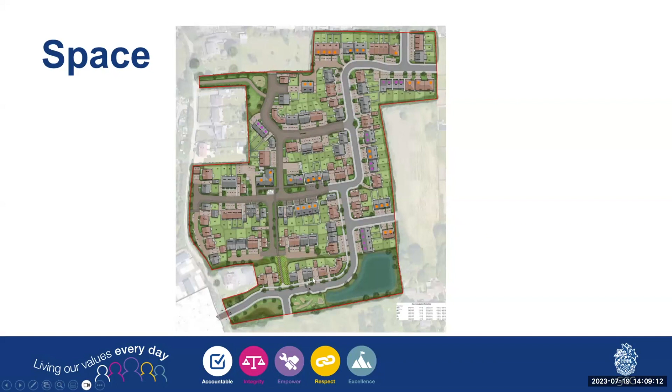And you'll see that what we're being offered is a tree, a generic green blob, into a verge between an adopted highway footway and an adopted highway carriageway.

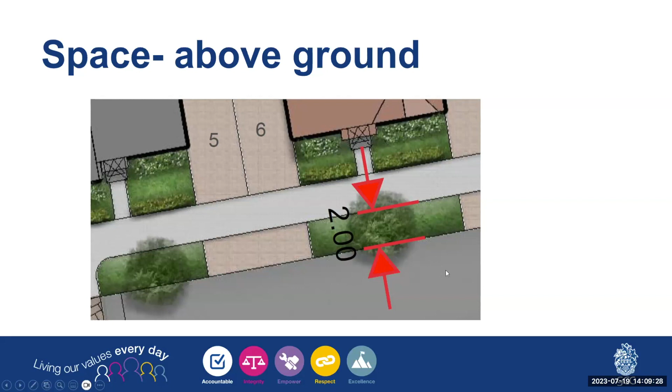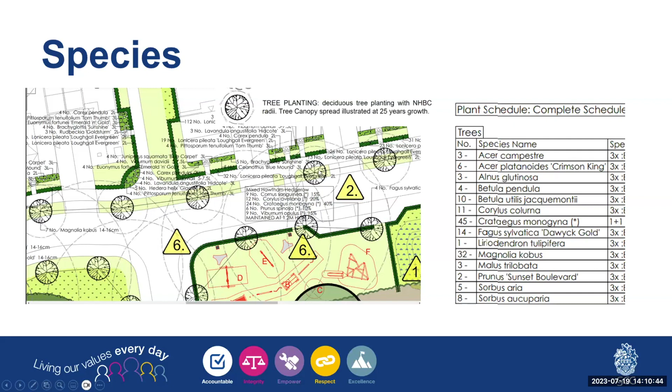No, I'm not an arboriculturalist - a lot of highway engineers, maybe I don't even like gardening very much, we don't have the expertise to know what that is. So I Google it, the RHS guide is generally my go-to. From that I can see that this tree, if it thrives to maturity, which is what we want, will have an 8 to 12 metre height with a 4 to 8 metre spread.

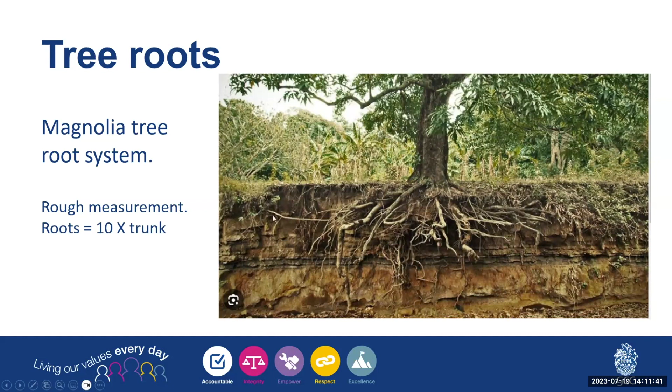I'll leave you to think about that. This is just something I found on a quick Google which I thought was quite illustrative - it's a magnolia root system, different variety of magnolia I suspect. But a very quick measure gives you roots spanning about 10 times the trunk diameter. So if we assume this trunk to have a diameter of about a foot, 300 mil, probably bigger than that but keeping the math simple, you're looking at 3 meters for the roots to spread.

Now let me just remind you of what space we're actually working with there.

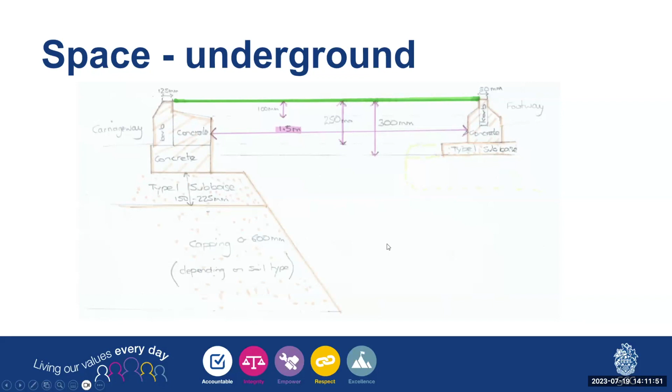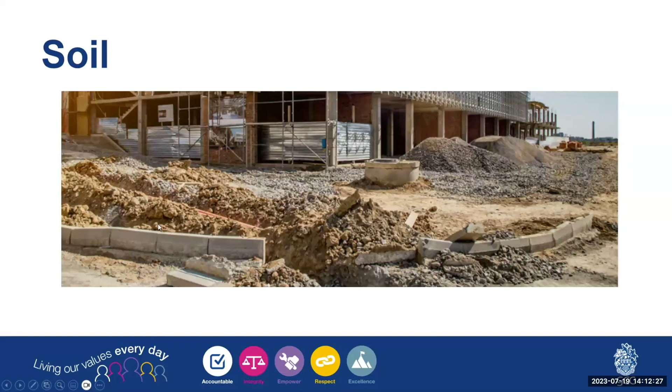Do you think it's appropriate?

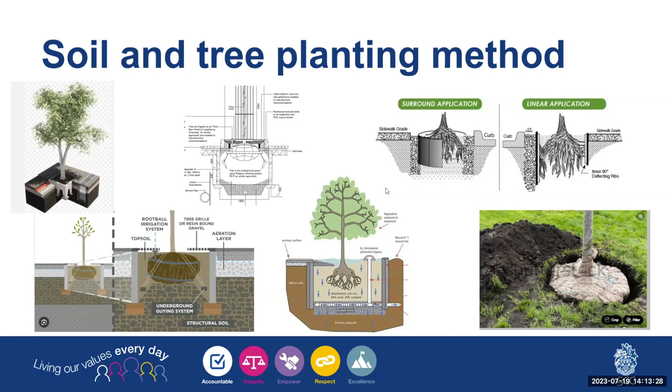So moving on to my last S, I told you this is going to be quick. Support. So I encompass that, it's just the initial support. You've got the stakes, ground anchors, drills, watering or not watering.

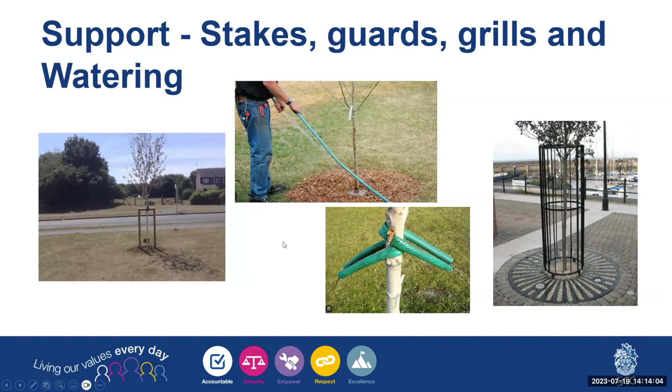So we need to understand what that species needs. That will depend on the weather, it will depend on the location, if it's windy, it will depend on the age of the tree. And also, if by some miracle we manage to get the space right, the species right, the soil right, and the initial support right, and that tree does thrive and grow to maturity, we've then also got to consider the ongoing long-term maintenance support of the tree.

Now, this is probably the hidden part of it. The first three parts that I spoke about, you're all probably very aware of - yes, get the planting right, get it started, get it watered properly. But this is what we as a highways authority, this is our legacy, this is what we're left with for 20, 30, 40 or more years. And it comes at a cost - it comes at a massive cost.

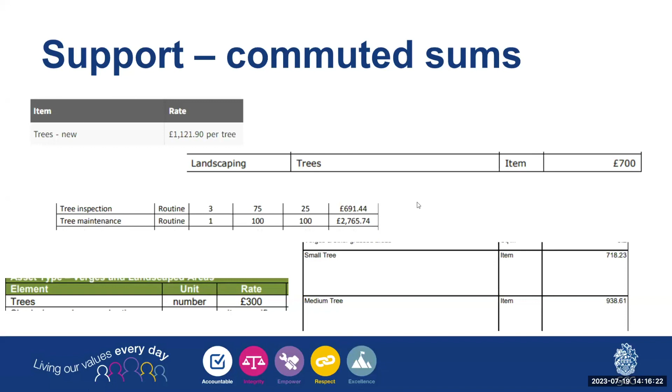So that is me done, I did say it would be quick. So these are the things that we need to understand as highway engineers: is there enough space? The space we start with, that's not changeable.

Species, is the species right for the space? Soil, is it the right tree planting method? And support, what support does it need long and short term?

So thank you very much for listening. Well, thank you very much, and that was brilliant. And I must say, I can't remember the last time I saw a magnolia as a street tree, so I'm with you on that one.

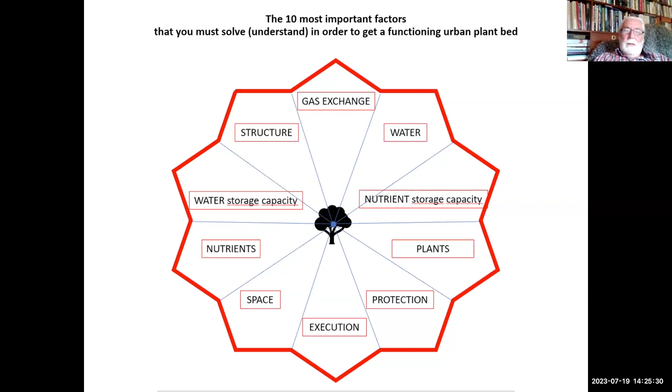And as I was fortunate to visit the University of Hannover, where they found out that the best material you could use in an urban environment to get a good plant bed, and to get the root system to grow the best and expand in the best way, is a stone material, sorted stone material in uniform sizes, almost the same size. Then you get the most voids between the stones, so you get extremely good porosity if you use this.

And we call it macadam in Sweden. I don't know what you call it, but it's crushed stone and it's sifted. And you can get up to 40% porosity in this stone material. And the biggest size stones we use below the streets and sidewalks, and the smallest we use in open plantation for shrubs, perennials, and trees.

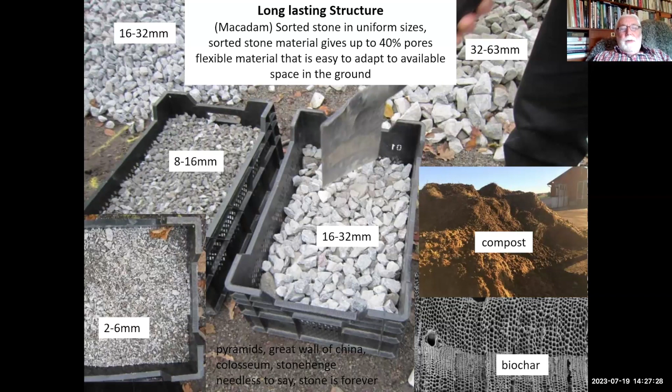So for example, the 2 to 6 millimeter size is what we plant all our perennials, shrubs and trees in, in open areas. And then we mix it with some sort of compost - you can use different kinds - and we also use biochar. Mostly we use the same amount of compost as biochar in the mixture. If it's below ground, below a hard surface, it's 15% compost and biochar. And if it's open space, open ground, it's 25% compost and biochar.

So this is how it looks on the drawing, a popular drawing from the handbook of Stockholm, where we show how we are building our plant beds in Stockholm. There's a very big stone material in the bottom, which is put down and then compacted, then flushed down with this combination of biochar and compost between the stones, so you don't get any compaction of this material that you flush down. Then you do it in different layers of 30 centimeters - compact the stone and flush down, compact the stone and flush down.

And then we have an aeration layer, an infiltration layer on top of that, so the plant bed can breathe and get enough oxygen, and you can also infiltrate the rainwater from the hard surfaces.

So this was the first method we used, and it was accepted because it was what we call macadam at the bottom, known as a road building material. Everyone building roads was familiar with this kind of material and how it worked. That's why we got approval for this the first time, because they could understand the material. But still we couldn't change the surface.

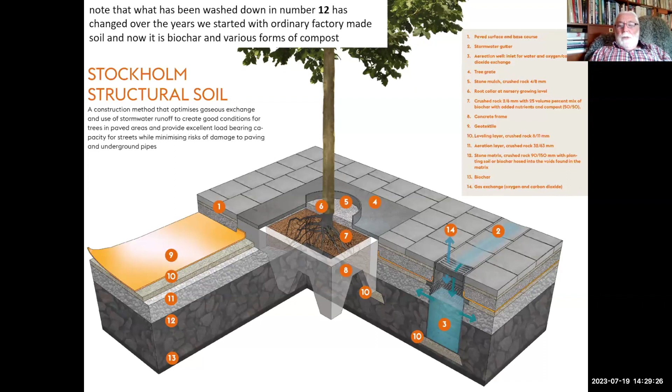Then we came up with the idea to make a simpler and faster construction, so we started to use a smaller size of stone. In this case, 32 to 63 millimeter stones, pre-mixed with 15% biochar and compost. It's easy to understand this is going to work so much faster in the construction period. Otherwise it's the same thinking - you use the well to infiltrate water and get the gas exchange to work.

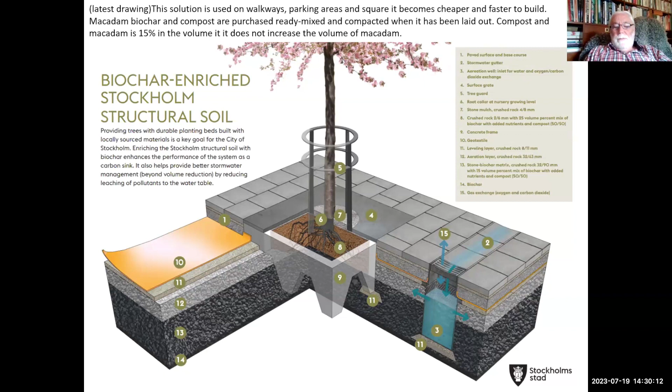Gas exchange, I always say, is the first thing you have to have the solution for, because if you don't have a working gas exchange, you won't get anything to work. You can go back to this and read it afterwards, because there's no time for me to explain everything about why gas exchange is important.

But you have to have oxygen in the ground. It's important for all the living organisms in the ground. If you want a healthy plant bed, you must have a good working gas exchange. And we make it with our wells or open surfaces.

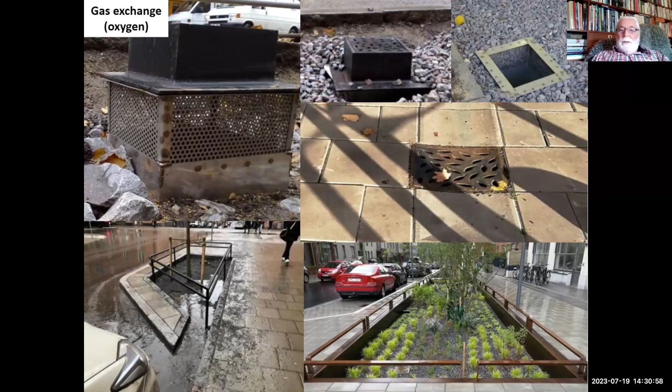So water - it's hard to say which is most important, but if you don't have oxygen, you can't breathe, so that's why I put it first. But of course, water is the second most important thing.

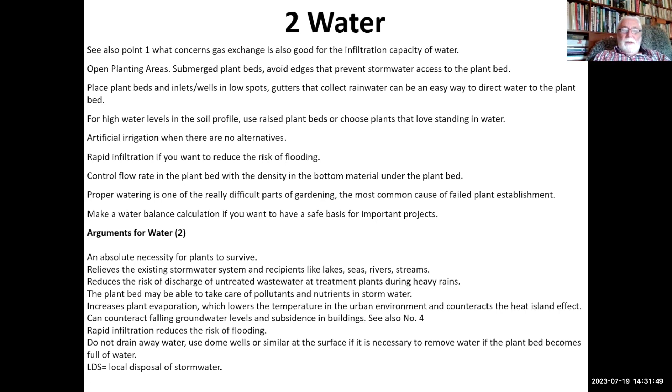And you have to know where you get the water, how you can infiltrate it, and how much water you can get. And of course it's fantastic for a city if you have problems with an under-dimensioned sewage system - you can take away a lot of water from the city this way. And of course, you should use it as close as possible to where you get the water from, so use the water locally.

And the same thing - we use the same wells to collect water in different ways as we use for the gas exchange. So they have the same function, or the same solution, to get water as to get the gas exchange to work.

Structure - of course you must have some structure. I mean, we plant Tilia, we plant Quercus, and we plant a lot of trees that are going to be several hundred years old. And of course you want to have a structure that will stay for hundreds of years if you plant trees. You can't depend on something that won't hold for less than 100 years.

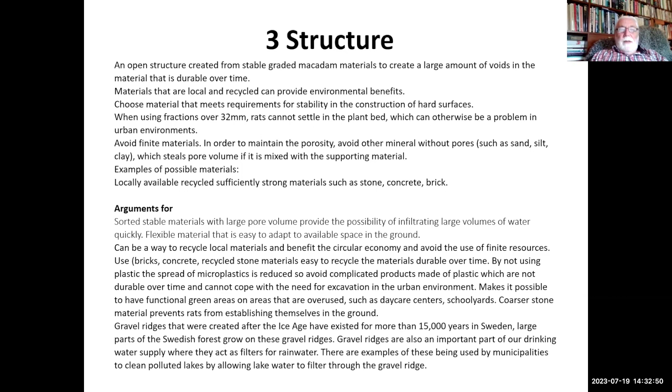So find your way of building a structure. In Stockholm, we use stone in the same way it looks in the forest around Stockholm - the old gravel ridges, eskers, I think you call them in England, from the Ice Age. They've been staying there for at least 12 to 15,000 years, and the trees are happily growing in these gravel ridges all around Sweden, and there's a lot of them.

And it's the same in mountain areas - you have crushed stones where trees are happily growing, and this supports the trees extremely well. It's good for gas exchange, and it's easy for the root system to penetrate this kind of stone material.

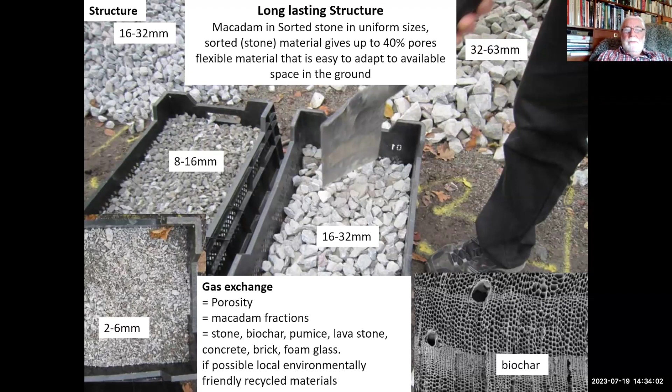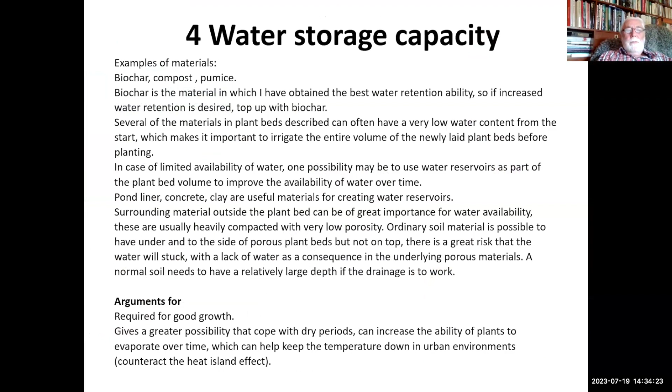Water storage capacity - we use compost and we use biochar. Biochar is fantastic if you want to have a good water storage capacity, and if you want to increase it, you use more biochar or compost. But biochar is the one that gives the best water storage capacity. Biochar, I don't know if you know about it - it's organic carbon, and it has extremely good qualities in different ways.

That's a whole long story that I could talk for an hour about biochar, but you can read more about it yourself. The compost could be it's so varied - you can add really decomposed compost, or you can have fresh organic material.

We have tried a lot of them. We haven't seen so much difference between the compost that we have been using. Of course, if it's a lot of easy to get nutrients, you can get much faster establishment and so on. And that's basic knowledge about how plants react to different kinds of nutrients.

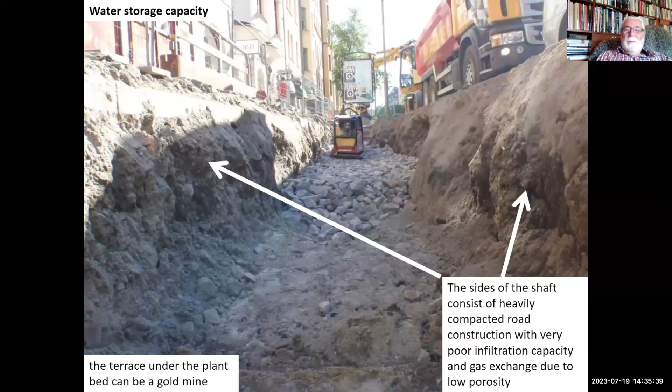Of course, the situation in the city is also important, what you have in the ground. It can be concrete, or it can be soil in some compacted way or something. Same with the nutrient storage capacity.

How we have solved that is using biochar. And it is amazing to see how much nutrients biochar can hold and share with the plants if they want it. And the same, the compost is also a source that can hold a lot of nutrients, of course.

What's happening in the ground when you use this mixture of stone and compost and biochar, you support all life in the ground, and you get the circulation and the increase of organic material, because the life is so happy in the ground. So it is reborn and dies and reborn, and the trees or the plants are putting down solar energy in the ground. So it will increase all the time if you have this open material that all the organisms are happy to survive in.

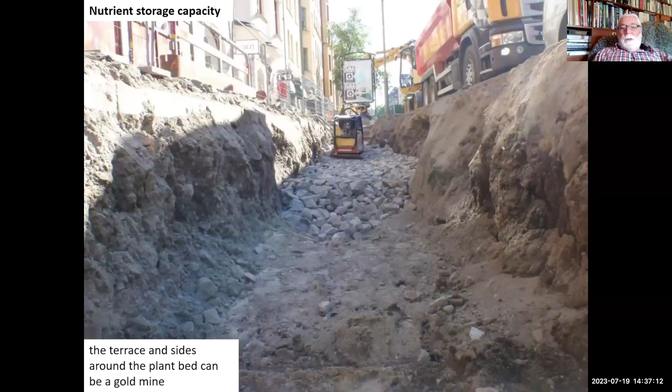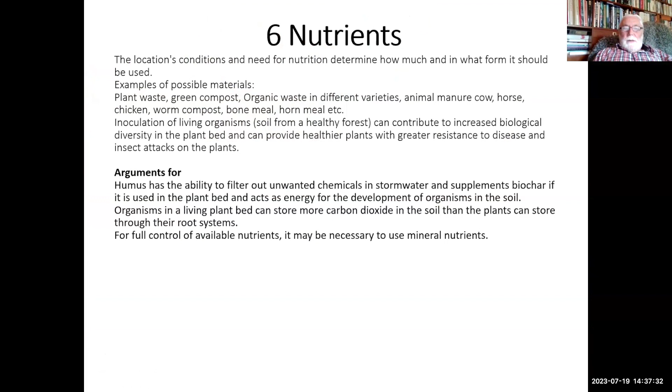And the same with nutrients - it can be nutrients in the surrounding material, of course, so it depends on what's around your plant bed that you're building. If you can get something for free from the ground below or on the sides of your plant bed. And as I've talked about before, nutrients depend on how much nutrients you want. If you're building your plant bed in a sensitive area with protected watersheds or something like that, you have to have less nutrients, of course.

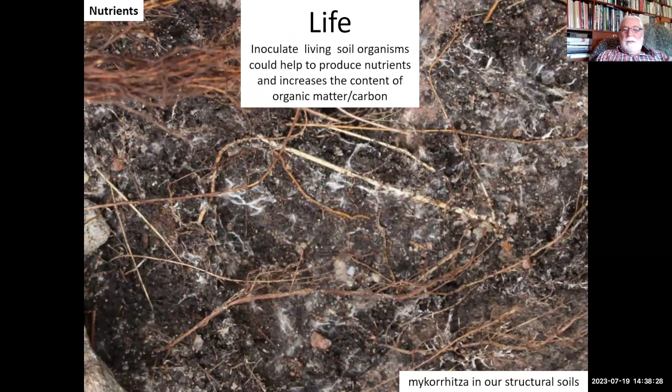But if you're in a king's garden in the middle of a city, you want to have annual plants with a lot of fertilizer that will give fast growth and healthy plants, then you have to put more nutrients in it. But we use different kinds of compost to get hold of nutrients. And of course, if you have this good environment in the ground, you especially need oxygen for the mycorrhizae to survive and support the plants too.

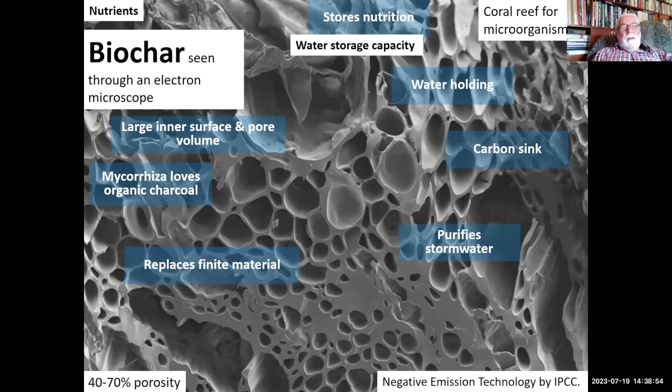And of course, the biochar is one of the solutions for us when we're using so much stones. We can have the biochar instead of sand and clay and everything, and they will hold the nutrients, and they will release it to the plants and to the mycorrhiza when there is need for it.

And plants, of course, you have to choose the plants for the place where the plant bed is, and how the situation is below ground and above ground. If you have space up, and if you have space in the ground, you can choose bigger trees, and depending on how much water you get hold of, you can choose different trees. If you have waterlogged conditions, a lot of water, high water levels in the ground, choose trees that love that kind of situation. And the opposite, if you have a dry situation, choose trees that can take that.

And space, of course, is important above ground and below ground, because if it's limited space, even if you get enough water and nutrients and everything, the plants can't produce a bigger root system - they can't grow as they could if the space is limited. So it's better to connect as many plant beds as possible. Then you will get better results for your plants.

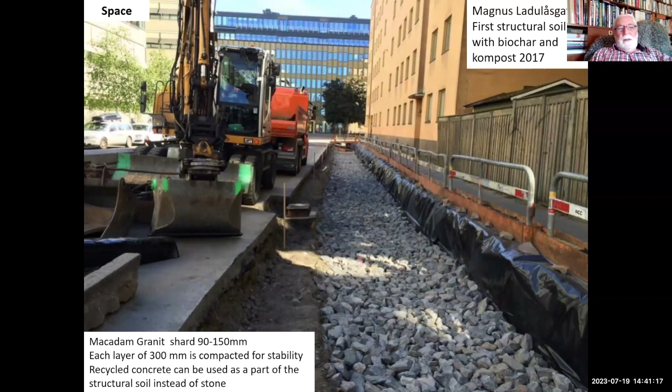But normally, if everything is right, the trees look exactly the same along the streets, and that's fantastic to see. Protection, of course - you have to protect your trees in some ways, and you have to think about how you do that.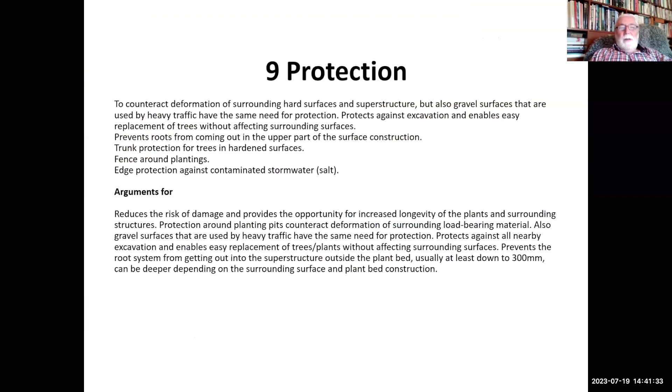It can be above ground and it can be below ground also. And this is how we plant. We use these kind of concrete boxes in Stockholm to plant trees inside that, but they're open so that the root system can develop out in the stone material. And it is easy to replant a tree if it's hit by a car or something and broken in some way. You just lift it up and put it down in a new one, and you don't destroy the surrounding surface material.

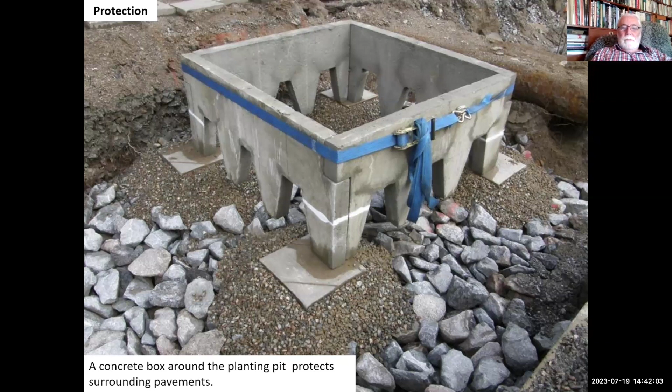But one of the most important things is how do you have control that the entrepreneurs that are building your plant beds are doing the right thing. You have to know what they're doing, and you have to control it in some way. You can't just trust an entrepreneur to do it right. You have to have control in some way. Otherwise, it can be a total waste of money when you make plant beds.

And we have had extremely hard control in Stockholm, where I have worked, and it has worked extremely well, both where we build these plant beds and afterwards for the maintenance. We follow the contractors all the time. We have a consultant out in the streets for the first 3 years, so we see that they water as they should and do everything that's in the contract.

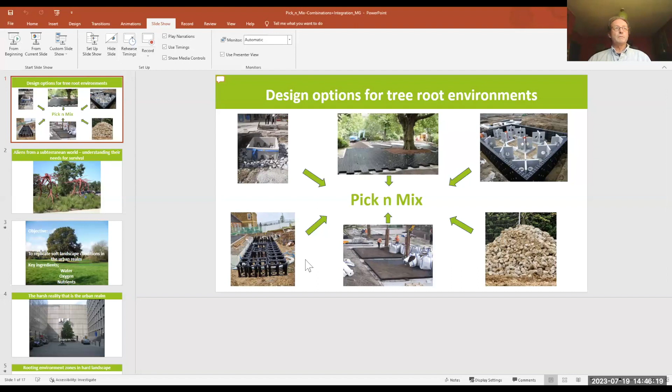I'm an arboricultural consultant and director of Consulting with Trees Limited. My background is in forestry, landscape design and construction, and primarily in arboriculture. And Consulting with Trees offers a broad range of arboricultural services and specializes in providing compatible growing systems within the urban realm for trees in all sorts of scenarios, but basically in hard surface situations.

And what we're going to do today is look at a few of the options that are open to you. You've heard about some of them already, and I'm hopefully going to run through why we need these different systems and how they might be most applicable. And primarily the fact that we've got a palette of options that we can use, and why use one if two is more appropriate. So just going to flick through the options that are available to you.

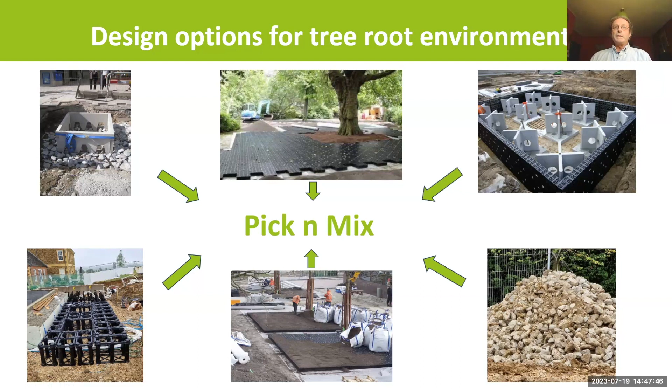But initially I thought we ought to start with why we need to consider these options in the first place. And I thought this, well, apart from the fact that I really like this sculpture, I thought it summarizes or brings home the fact that we really need to understand the below ground environment and what tree roots need, how they function, and what they need to survive and succeed in the built environment, as they would if they were in the soft landscape natural environment.

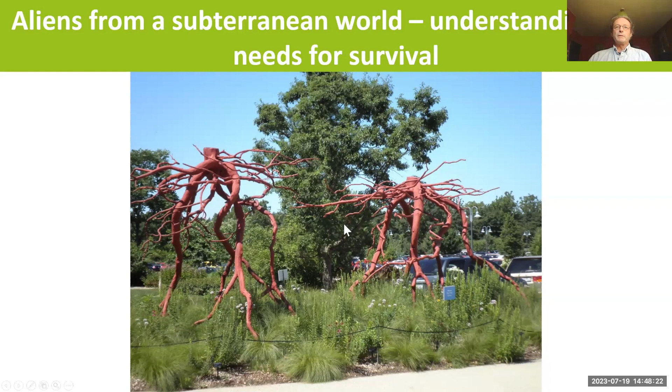So essentially, this is what we're looking for. I would hope that we want a mature tree that's healthy and vigorous, that is compatible in its landscape and capable of sustaining that health and vigor in longevity. Now, some might argue that the natural environment for that tree would be in a woodland, but essentially this is more realistic of what we're trying to achieve, I think, for our urban trees.

Now, the reason for the success of the tree is perhaps that the space around it offers a large area of permeable surfacing that enables the exchange of gas, the access of water and nutrients, and the uptake of organic matter to give us the nutrition that we need, in addition to the oxygen exchange, that's needed to create what we would refer to as topsoil. And for the purpose of this presentation, I'm going to refer to it as growing medium.

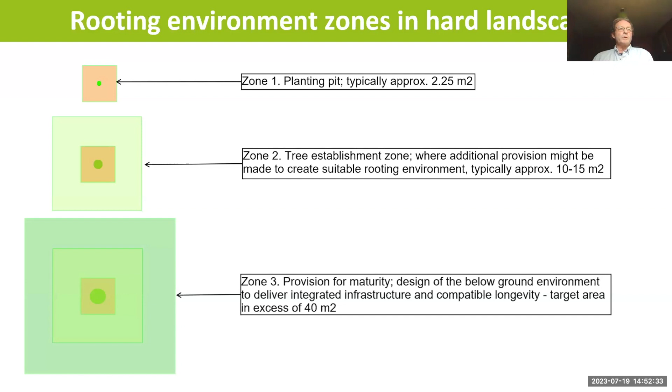So if we look at those in a bit more detail, Zone 1 is essentially a hole in the ground large enough to plant a standard to extra heavy standard tree, and provide a small amount of good quality growing medium, and is usually capped with a permeable surface such as a metal grill. So Zone 1, I suppose, is what you would provide if you were planting in a soft landscape setting.

The planting pit would usually incorporate irrigation pipes, which act as aeration and irrigation pipe, hopefully - a simple pipe wrapped around the root ball of the tree.

Unfortunately, all too frequently, this is the maximum provision that is made for street trees or trees planted in hard surfacing. The result being a limited chance of survival, a low chance of healthy establishment, and a poor chance of reaching maturity. Combine that with an unnecessarily high chance for negative impact to other infrastructure.

So what we're saying is that there's a massive need to ensure that provision is made at the design stage. When you make the decision to plant a tree, we need to look at these three zones before we finalize that design.

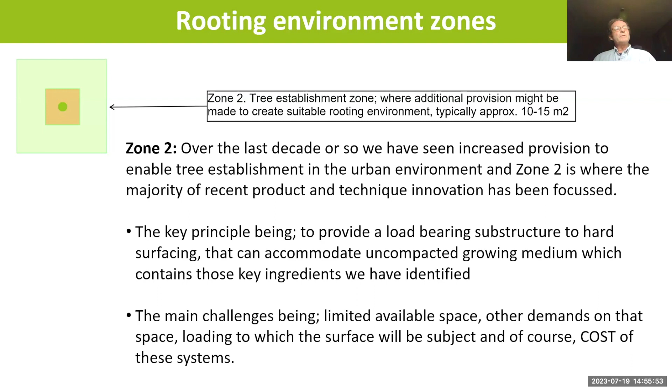And what I would also say is that whilst my diagram is fairly formal and square, what we're looking at is very variable shapes and sizes that we need to utilize, and these will vary for every site. There's a need for each design to incorporate or accommodate the site needs and to be bespoke to that site.

So Zone 3, as I said, this is the provision for maturity, and this is the most challenging of all, as it requires a holistic change in the mindset to the way we design and manage the subterranean urban landscape. I think we're seeing these sorts of changes now in our house building, the way we heat and insulate our homes, the recognition that we can't carry on as we have done for years, given the climate change issues we're facing. It's the same principles we're applying here to designing trees into the urban realm.

I think, as Jim said, essentially your urban trees are another utility and an integral element of urban infrastructure.

So when we're looking at the options and potential sites for trees, I think the key areas we can focus on are new build. That's the easiest, we've got a blank canvas, maximum opportunity. But where there's opportunity for regeneration or restoration projects in our towns and cities, these are opportunities we should be at the forefront of, having our say from the earliest possible stage, so that we can get the trees with the right provision in the right place.

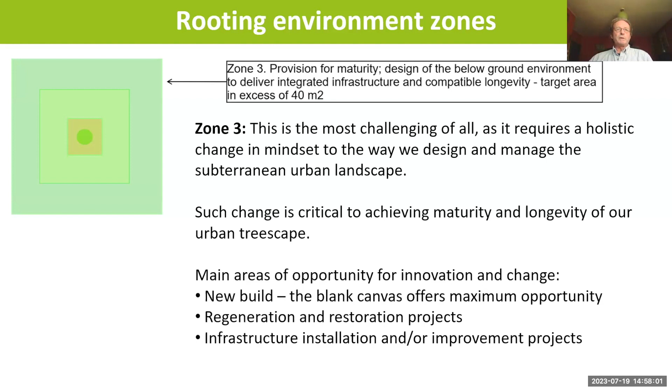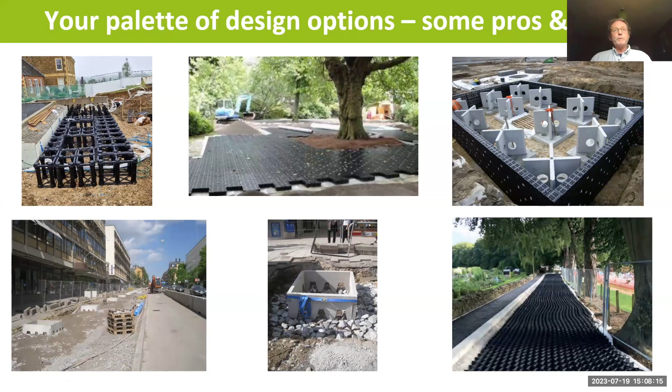Okay, I think that's sort of outlined the main criteria. I thought if we've got time, we could have a quick look at a case study or two.

This is a project, it's a private residence where a swimming pool where the client wanted box head yew trees around the pool, and it's a fairly intensive construction with very little room for any soft landscape space that's in the wider garden, but around the tree we had to make provision for these trees, which are

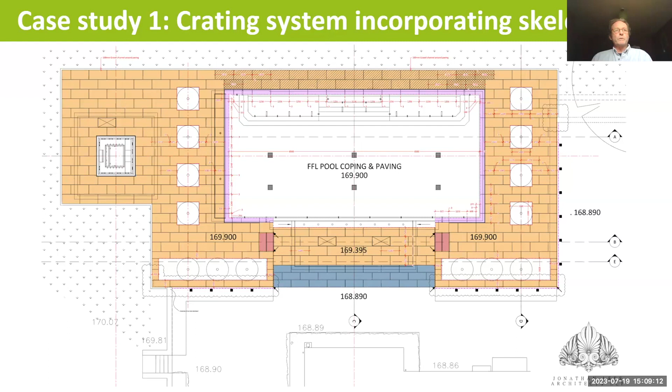substantial trees. They're coming in at semi-mature specimen size and with root balls in excess of half a ton or a ton, and so we had to make significant provision for their establishment and long-term growth.

The whole area will be sealed with paving at the end of it. So this, you can see again, we've used the crating system here, DeepRoot Silva Cell, and you can see the extent of the cells that will be constructed beneath the paving.

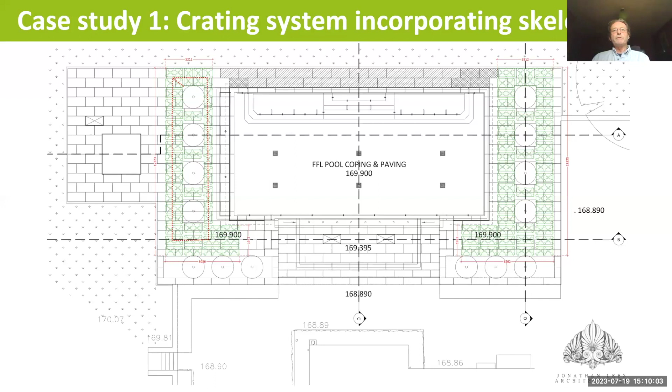Quite important, because there's very little access to soft landscape area, it's quite important that everything the trees are going to need is provided in the cells, and the only reason we were happy that that was all they were going to have is that they are going to be maintained as topiary box head yews, and therefore the canopy will not ever be significantly larger than it is when they go in.

Looking below ground, one of the key areas we focused on was ensuring sufficient irrigation and aeration. In addition to an aeration pipe around the root ball itself, we've built in irrigation systems using 100mm diameter perforated land drain pipes, with two layers so that soil at the lower levels gets aeration as much as the soil at the upper levels.

In terms of the mediums used to create the infill, we try to use soil on site wherever possible, because it keeps costs down and increases sustainability by utilizing what's available. We assessed the existing sub and topsoil, and some of it was suitable for recycling. We then mixed that with 50% sharp sand and 5% biochar - you can see these soil mixes here if you're interested.

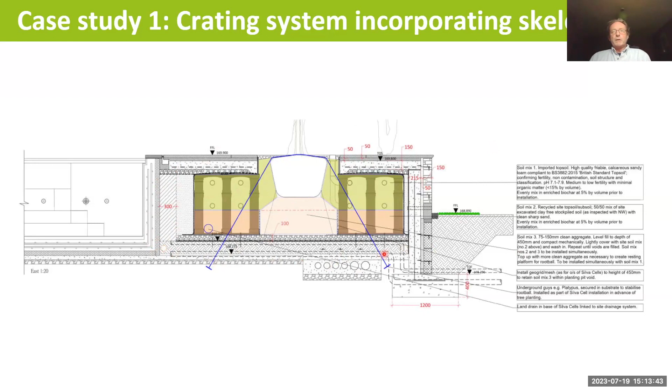Looking at it on the ground, you can see the Silva Cells going in. Here's the tree pit area - the Stockholm soil has been added to the lower level, supported by a net going around the outside of the tree pit. That net is then cut off at the level of the plinth so the tree roots can ingress into the remaining cells.

Someone was asking about the cost of biochar in the chat - that one ton bag is about £2,000 worth of biochar. As it was a 5% mix, we're not putting much in there, so a little goes a long way. But it is an expensive product, and there's a need to consider whether we use enhanced biochar. The suggestion from recent research is that enhanced biochar with nutrients already added prevents it from leaching nutrients from the soil it's mixed with.

Sorry, just to interject, Martin - Jim, how are we doing for time? I think, Martin, if you could just finish on this case study and then we'll move on. Okay, sorry, yeah, I'll flick through.

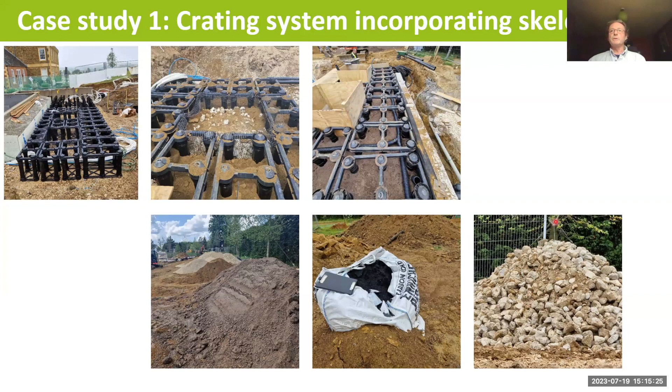Case study 2, we're going to flip. Martin, I'm afraid I'm going to have to ask you to conclude. Sure, I'll finish it there.

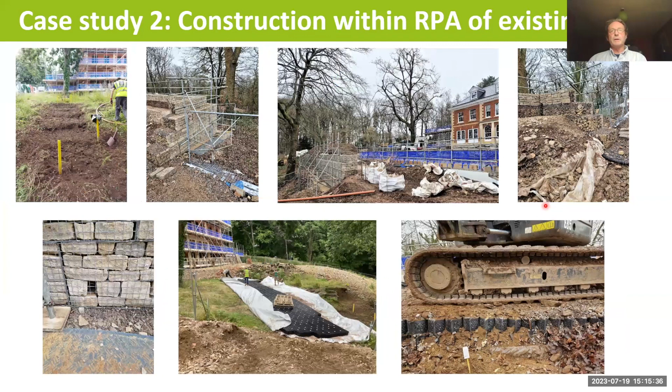So basically, in summary, we're looking at the need to embrace and promote innovation, education, collaboration, and integration in order to deliver maturity, sustainability, compatibility, and longevity of our urban treescape. Apologies for overrunning there.

Thanks, okay, thanks very much, Martin. That's fascinating stuff. I'm particularly interested to hear about your conceptualization of the three zones, so we'll perhaps talk more about that in the general discussion. Sue, are there any really quick urgent questions, or should we move on? Nothing very urgent, I think we can move on. There's quite a lot which I think comes into the general discussion, so let's do that then.

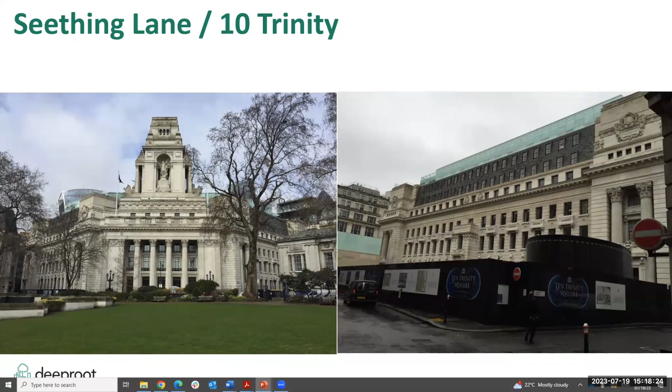Around this time in 2012, Sue and I met with Patrick Hegarty from the City of London Open Spaces Department to discuss this project, the project's potential really.

This is also the site associated with the diarist Samuel Pepys, who witnessed the Great Fire of London in this vicinity.

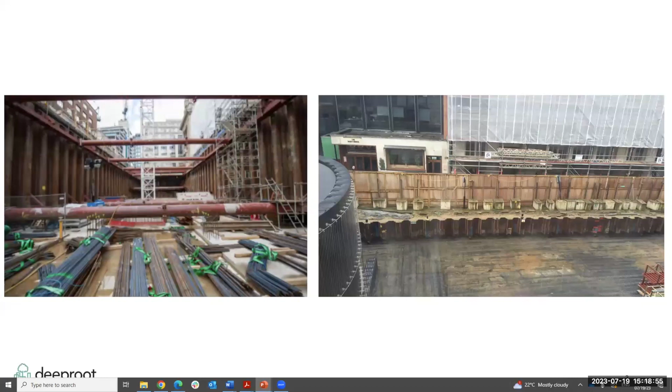On the left, you can see the extent of the significant excavation for the basements and the underground car parking area. It's pretty wide open when we turned up the first time to have a look at this project. On the right-hand image, the project has progressed with a concrete podium now in place, and it has been waterproofed at this stage. This is what we would start to build the garden on.

When I was putting together these slides, I was also thinking it's quite unique for us to be building the garden up from the ground upwards and not really digging down as we usually do when we install the Silva Cells. So one of the main project goals was to try and produce a healthy garden that would last well beyond 100 years.

The build-up over the concrete raft consisted of a drainage board, a stable sub-base layer, then the Silva Cells, and a 300mm aggregate and pavers layer on top. We needed to offer direct support to the granite blocks and footpaths.

Supporting them with a Silva Cell offered a significant weight saving in comparison with conventional support options, and it offers the ability for the trees to share the soil from the neighbouring planters.

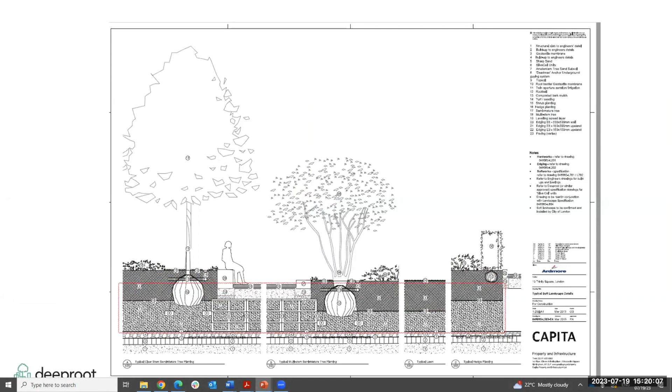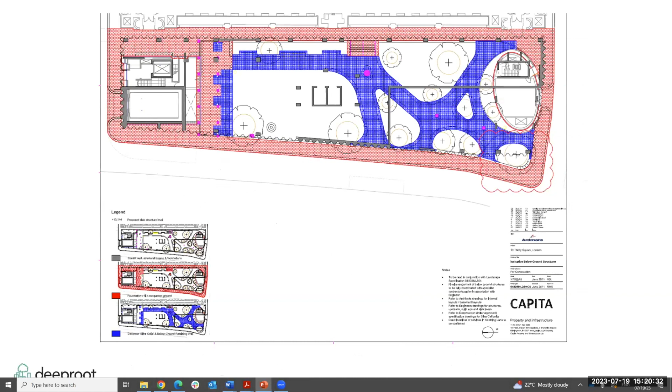For anyone who doesn't know what a Silva Cell is, it's basically just a modular suspended pavement system that uses soil volumes to support large tree growth and provide on-site stormwater management. It does this through absorption, evapotranspiration and interception.

The Silva Cells are currently manufactured in 3 different locations: here in the UK, Canada and the USA. They're an open structure, designed this way to accommodate unimpeded, larger root structures and deliver any type of soil. The round posts will simply deflect roots if they come into contact with them rather than trap them, and the system is not connected laterally, so they're independent units, independent stacks, not directly relying on the cells next to them to gain strength or loading capacity.

There was a lot of thought in the design and how best to deliver the soil in the system. They're a pretty large unit really, I had trouble dragging them around the UK in the early years. They are 1200mm by 600mm with almost 350mm between post and post.

Being independent also gives us lots of flexibility in the field when we come across utilities and things in the ground that we didn't really expect to be there. In my experience, every city, every town we've installed this, we always come across utilities that were never really picked up by radar or pre-digging surveys.

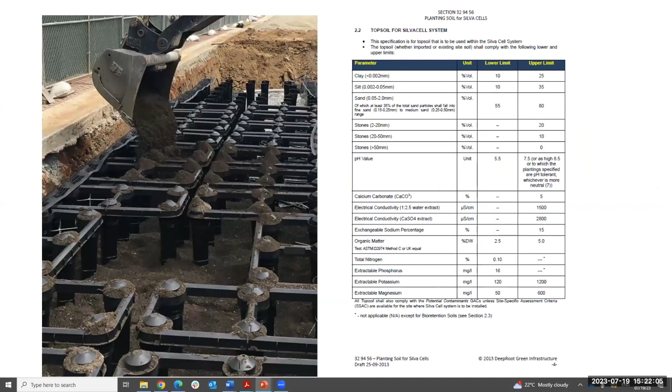So we delivered millions of cubic meters of soil and uncompacted soil into the Silva Cells over this time. Soil quality has been mentioned previously. It's vital to any project's success, and soil is really a key component that should never be overlooked.

DeepRoot have written a soil specification that we're happy to install in a single soil profile in our system. This specification basically narrows the parameters of the typical topsoil we have, the BS 3882 2015. It just narrows those parameters a little bit.

It's also been mentioned by previous presentations, and I've often seen myself, that soil being stripped away on site is taken away only to bring in a manufactured soil, and sometimes this is possibly not as good as what's just left the site. So a more sustainable option would always be to first test the soil suitability on site before we start taking it away and bringing in new soil.

As you can see, this image demonstrates that the Silva Cells are mechanically loaded with soil into the system. We do ask the installers to walk around the soil as they load it into the system, and this is really the only compaction the soil needs. This also helps eliminate any large air pockets, and we deliver the volume that has actually been specified, limiting any shifting of loose soil which can cause significant soil settlement once water or moisture is introduced.

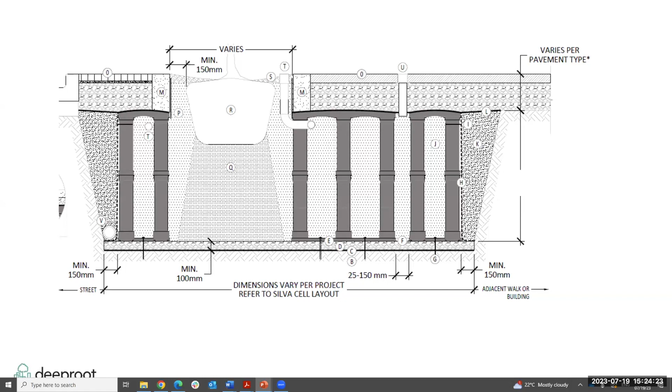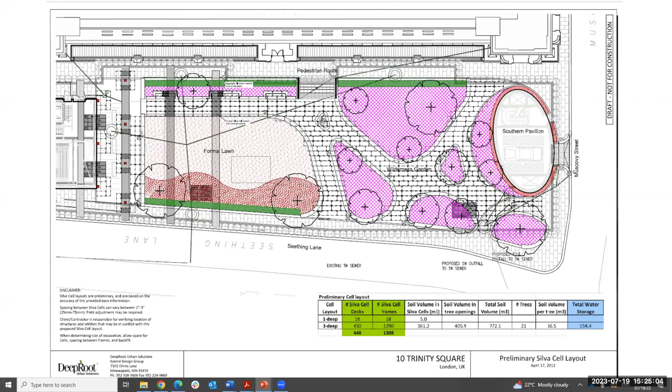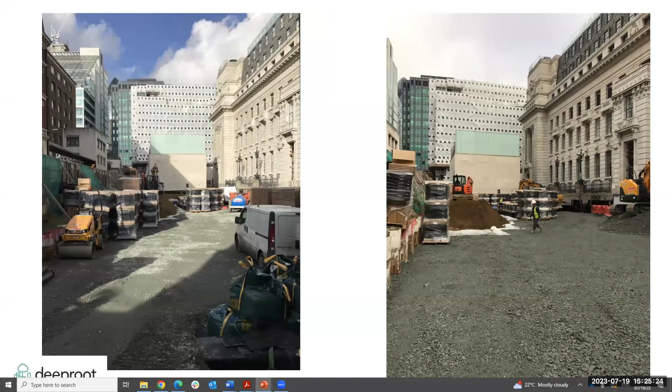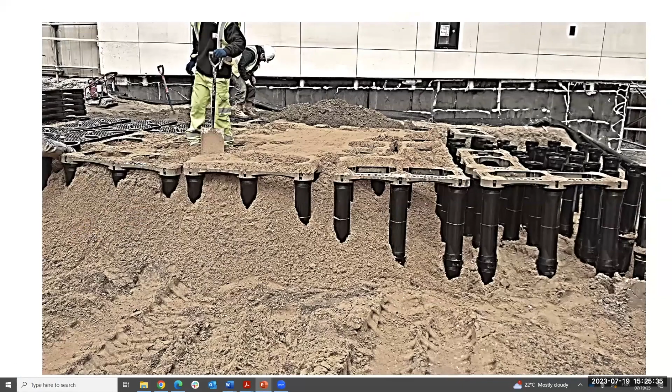First, the screeded layer was placed over the drainage board, the void former. This would be the solid base that the Silva Cells would then be placed on. These are the first Silva Cell 4X units being installed that would eventually support the pagoda, the area just before the lawn.

We used a sandier soil than we've normally used because of the overall soil depth on this project. This was really to aid drainage and prevent the soil becoming anaerobic from compacting under its own weight. The general rule of thumb is we do not need to place a structural soil in the Silva Cells because the Silva Cell itself is the structure—it's providing that load-bearing structure.

That's why the soil remains uncompacted within the system. This way we deliver soil with a much smaller footprint than a structural soil would need to give the same net gain for the trees.

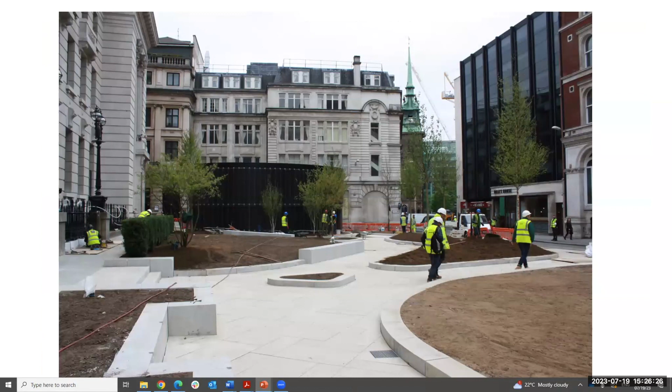So by July 2017, a total of 1,300 cubic meters of soil was used across the site, and you can see the planting areas and footpaths really taking shape.

Just a reminder, if you strip away the hard landscaped areas, you would see the structural cells supporting the pavement and the granite blocks. We placed that on this side, up to and on the inside of the granite blocks, so they were supported directly on top of the silva cell to prevent the granite blocks settling in any way.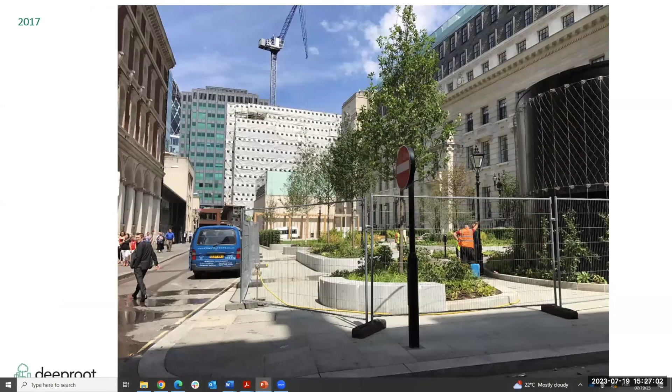Some 14 trees were planted and around 3,000 shrubs in total. This will all improve the biodiversity of the area and become an important habitat for some of the wildlife in the city.

Because the Silva Cells are supporting the paving and granite blocks, it was important that they have the compressive strength. With this paving profile, they're able to comfortably take a load of 11,000 kilograms on a surface area of only 200 millimeters by 200 millimeters, or put in more context, 23,000 kilograms per axle, so more than twice the limit of an articulated vehicle.

So we have little concern about articulated vehicles popping up on this curbside or anything over the top of the cells. We're more than happy that they can sustain that traffic weight.

One of the most important aspects of any successful project, especially for DeepRoot, is really supporting the infrastructure. I know we're really judged on the success of the trees, which is understandable because that's what the product serves. But we also need to be sure there's no settlement in the paved areas, because that's a failure for the product if that was ever showing.